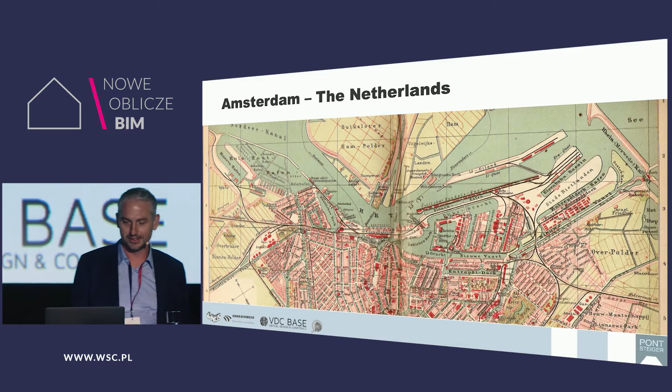The project is in Amsterdam, in the Netherlands, and you see the city center. Maybe somebody has been there already. And in the left top corner, there's an old wood harbor. We were importing wood from Finland, and we were collecting it there before it was used for the pillars or for the houses that we were building. It was a redevelopment project where a lot of houses have been made. And our story is about the big project here in the corner.

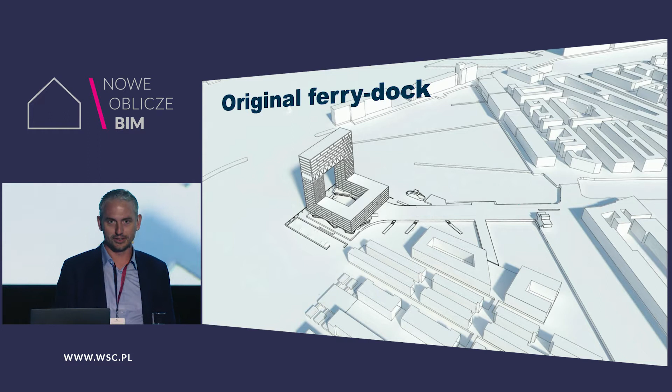It's called Pontsteiger. And why is it called Pontsteiger? There was a ferry, and a ferry in Dutch is a pont. And steiger is like a dock, so it was the dock for a ferry. And the ferry is something that we have moved to the right. And there's a building with 366 apartments.

On the top floor, it's the most expensive apartment of the Netherlands. It was sold for 16 million. It was 1,440 square meters at that time. But later the owner sold several parts as an investment, so now it's not the biggest apartment anymore. But at that time we were thinking that was the most expensive apartment. And from the apartment you have a view over the canals Amsterdam is famous for.

And to show how we have built it in the last 2 years, I have made a small time lapse. You can see it's in the water. We first have to make a wall to pump out the water. And after that, in the Netherlands, we live in a swamp, so it's not strong enough to build houses on. We drill pillars into the ground, 3,000.

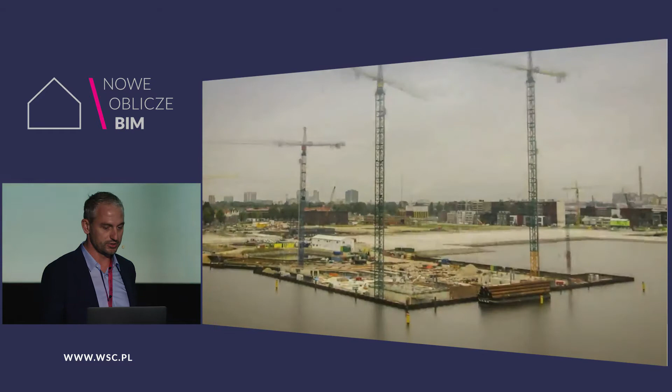And first we make the parking basement. And after that, our chief executive said we have to build this building in 2 years. So that made us think differently and prefabricate everything. And as you can see, the towers rose one building story each week.

To make the bridge, these steel frames were sent to the construction site by vessel, by boat, from the other side of the Netherlands, and picked up by two cranes and put on top of the 2 towers. So the construction of this part of the bridge took, I think, 1 week.

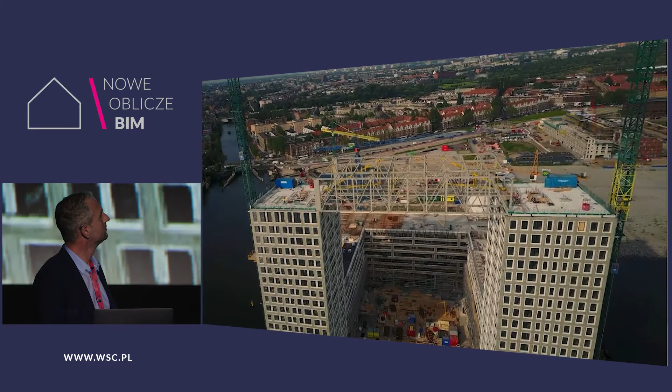And to start a project like this, I was the BIM manager of a joint venture of 2 companies, De Nijs and Dura Vermeer. Now I have my own company, VDC Base. And when I started working at that company, this was my desk. I had paper drawings. I had a laptop at that time, 2006.

And we had a kind of old-fashioned exchange format where we were exchanging the information about the building projects, called drawings on paper, with some hatches. And we had a very modern way to store all those files in the wall. And in 2007, we started with the first BIM models.

This is a museum in the Netherlands. It's an old building from 1600 something. And to make that building suitable for a museum, there had to be a lot of steel inside. You see the BIM model here. So it's a BIM model for only one discipline, the steel supplier.

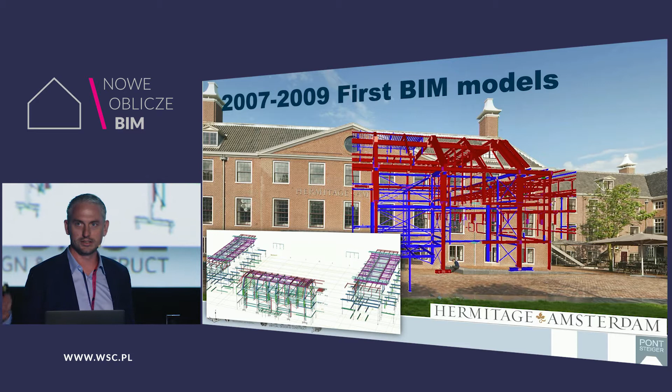And after this project, I went to another project in 2009, and that was fully coordinated in 3D. We had 8 different steel suppliers producing in several factories, all at the same time. And it was a shape which was not straight, so we needed to coordinate everything 3-dimensionally.

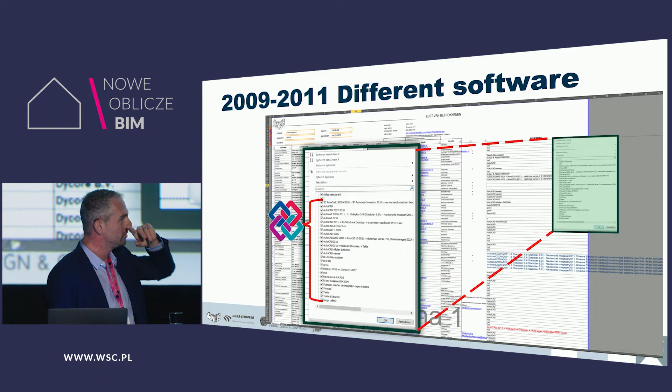And at the project, you have a lot of participants, stakeholders, and we had a list of people who were working for us. And I added one column at the end. If you filter that column in Excel, you see this: how many software packages do we communicate with for this project? So that's a list of like 10 different AutoCAD applications, and Tekla, TrueCAD, Revit already.

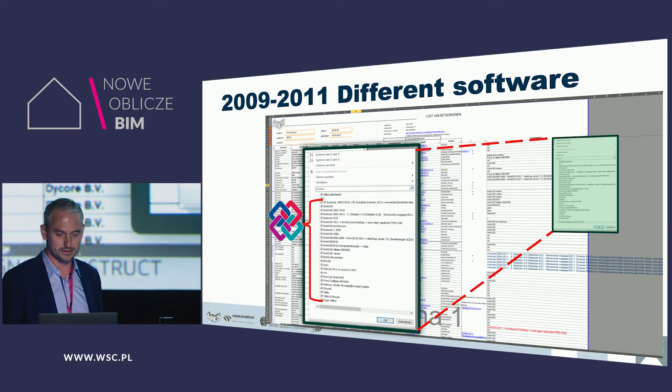And the common ground was that we were exchanging all those models in IFC. And I was coordinating that in a different program, which was coordinating IFCs. And unfortunately, we did some 2D issue management. So we also had the drawings, and I had to mark those drawings with my comments and do some redlining. And I tried a little bit in PowerPoint to do some 3-dimensional issue management. You see PowerPoint here.

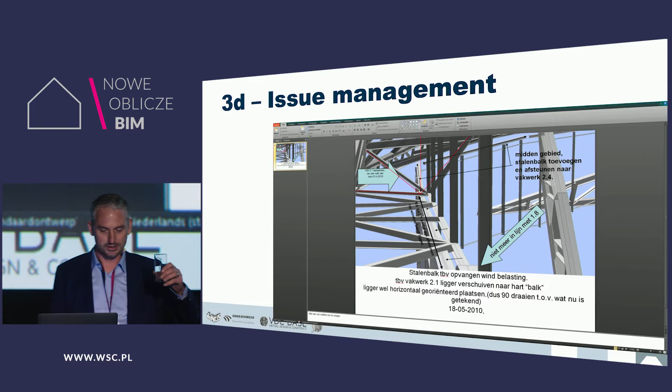Sometimes this was more valuable for my steel supplier, to give him some issues. And for the quantity takeoff, we used Excel. But almost all values are just typed into a computer, so you can make mistakes as a human. So it was a lot of work, and we got a lot of headaches from that process.

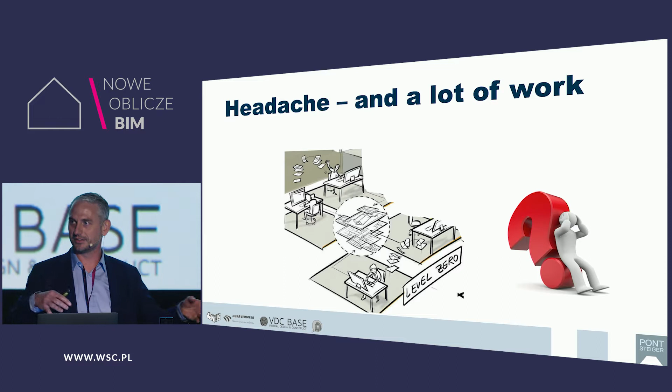Does anyone recognize the process of drawings, coloring, redlining, and then calculating it in Excel? I see some people laughing here.

So my function was to implement BIM into our organization. But why BIM? Of course, to reduce the headaches on the project. And it was a company policy at that time, because after the project I just showed, my CEO said, we're going to do this every project over and over again. And we were thinking to build it in 2 years with all the prefab. It was impossible without BIM models.

We wanted to save money on the project, and also to speed up the construction. And there was no working space. It was in the water, so we didn't have any site around it to collect materials and do things like that. It was a skyscraper, and we wanted to raise the bar for construction engineering for our companies, and because we can. And last but not least, a shortage of labor power.

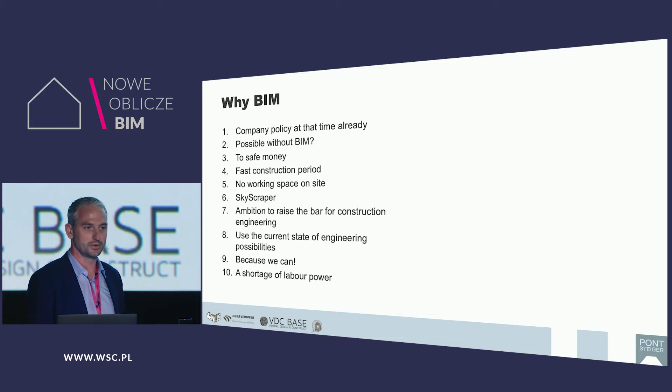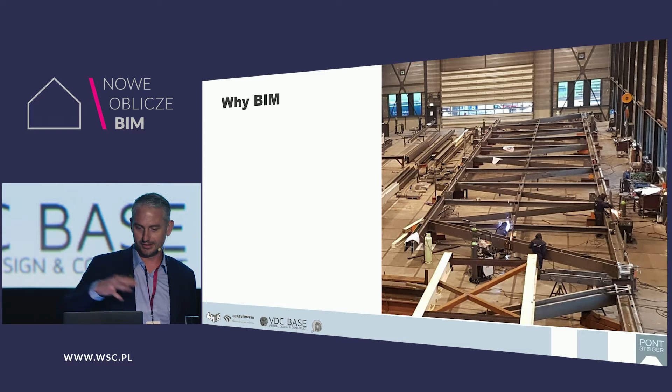So we don't have enough people to work on the construction site, so we have to do more things with machines or robots. So we prefabricate, and to prefabricate you have to build it first in the computer, virtually. So we did BIM from the designers. The architect was also modeling until the end, but also to interact with manufacturers and back. So the frame you just saw with the 2 tower cranes was first assembled in the factory, then moved to the construction site. So that was one of the prefabricated elements.

So we needed to make some agreements, and because it was a joint venture of 2 companies, the guy from the other company and me had to make one plan. And that's a good thing about a joint venture of two companies: you can do better than one company on its own. So we decided, let's put all our BIM protocols, execution plans, exchange information requirements together. What's the core? What's the best that we should agree on? We didn't want to think of something new, but to combine several things that are already working.

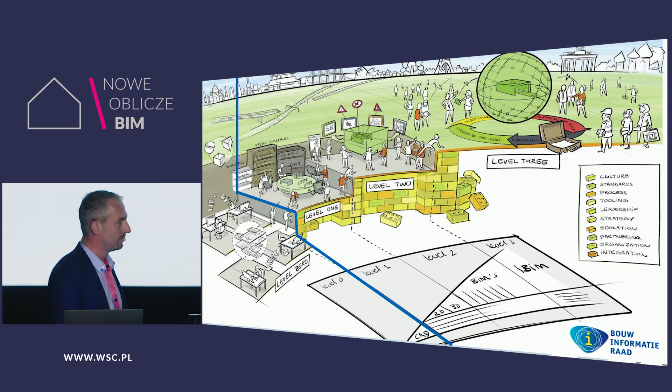And for the BIM levels, we have a national organization called the Construction Information Council, which divided BIM maturity into several levels. If you see my history working on BIM level 0 with paper drawings, I used that picture in one of my slides with the headaches. That was BIM level 0. Then you can do BIM level 1. BIM level 1 is that all the suppliers are making their models, but they are not federated yet. You see them just next to each other.

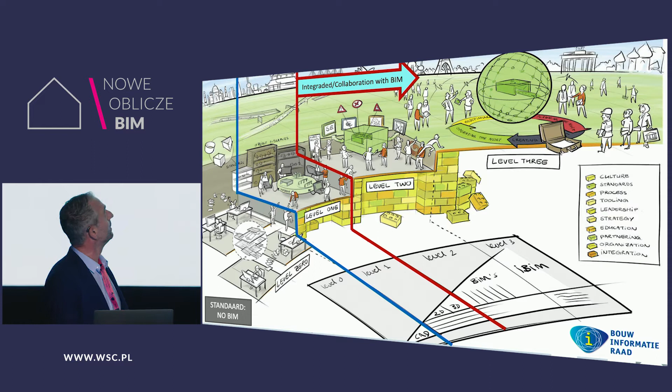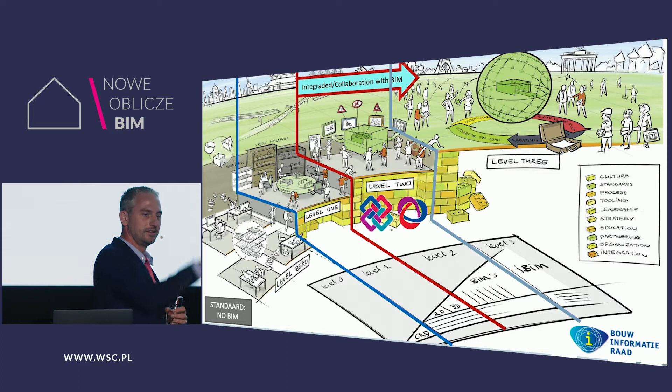So we decided we do BIM level 2. And from BIM level 2, you are integrated. You integrate the BIM models together and do the analysis with that. So you need two main files, IFC and BCF. I saw a lot of presentations using BCF and IFC too, so I'm really happy to see that. And you have BIM level 3, and some people are thinking about what's happening there, but we decided to do this whole project on BIM level 2.

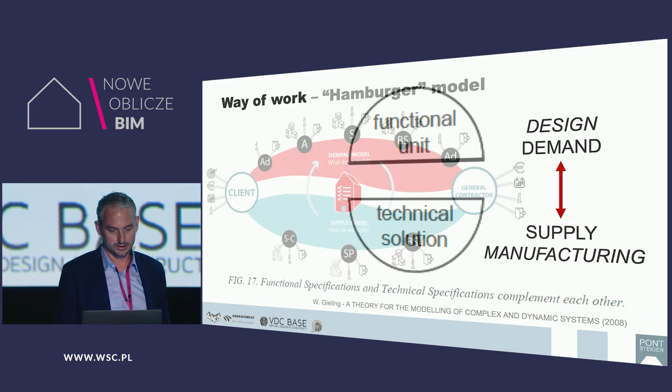We made a Dutch flag, red, white and blue. I think all general contractors in the Netherlands work with this infographic. You have the architect on the top, he makes his model, and you have paper drawings, some different information. Also the structural engineer, but also the suppliers. And everybody is involved. So that's the hamburger model.

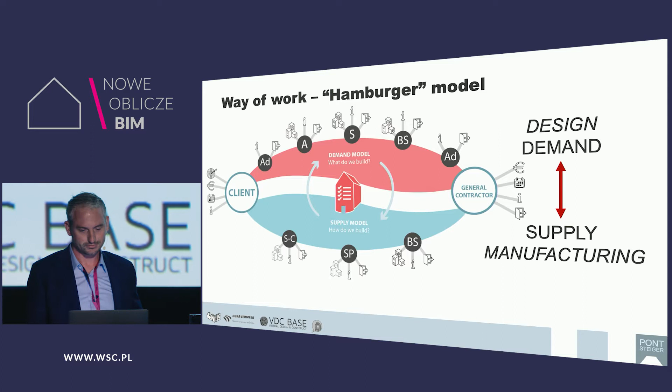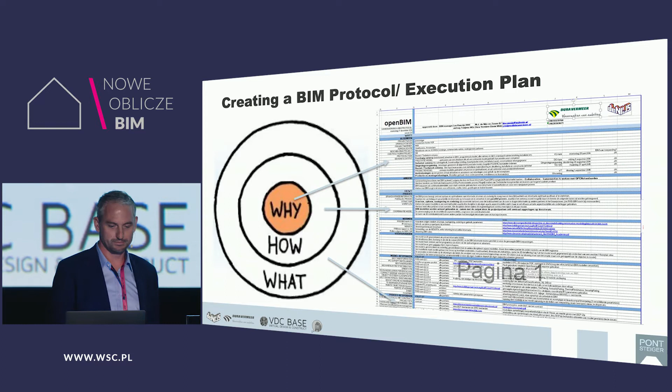And to create a new execution plan, we had several already. I had some coaching lessons from a coach, and they said you have to look at the golden circle of Simon Sinek and tell your story always in the same order: why, how, what. So we decided to make a BIM execution plan on one page, on one Excel sheet, and we said, why are we doing this? How are we going to do this? What are we doing? Why, how, what? And to understand the project, we made an infographic which explains IFC.

So IFC: you have a file with a site and a building story, and on the building story you have spaces. Spaces are in the requirements of the client, and around the spaces you have different objects to form the spaces, and they have different kinds of information. So we tried to explain to all the participants with this poster how it works.

And if you do a big project like this, the first decision you have to make before everybody starts is how do we frame this project. So we decided day one how to split this model, because there's still not any software that can handle all the models in one view. I've never seen this project in one viewer because it's too large. And we coordinate like the green part in the beginning. A month later, you do the red part, so you can manage that better.

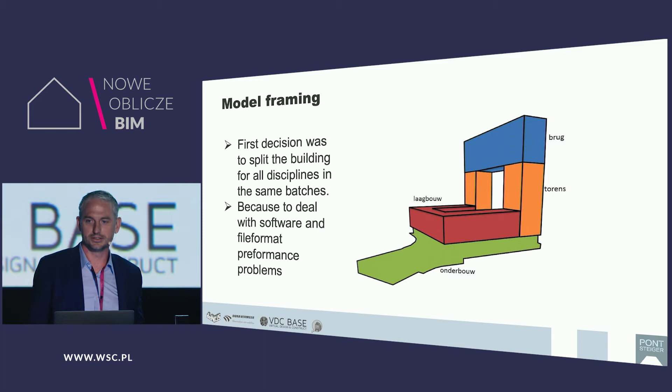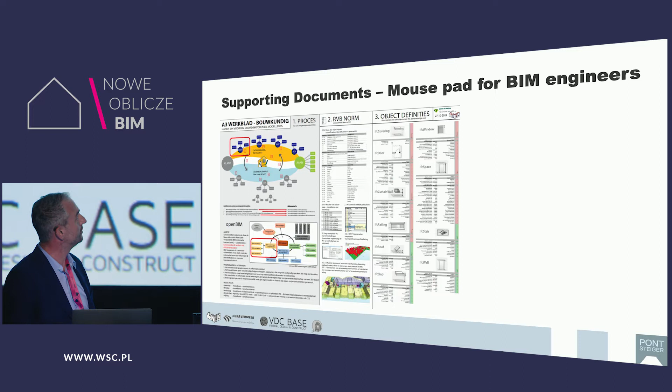And we made some supporting documents. This one's for the architect, and the architect has to make some spaces, the fire rating objects, and we said for each object which properties should be in the model.

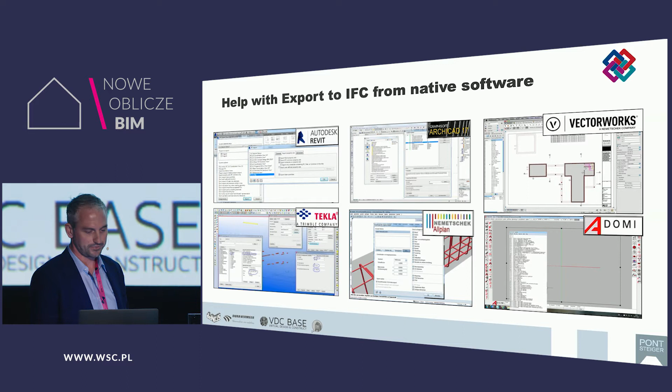And a lot of software developers said to us, if you work with IFC, you lose a lot of information. And we proved that is not true. You only have to know what you're doing. So we investigated all software we are working with, and we came to the settings that you have to use to export a model without losing information.

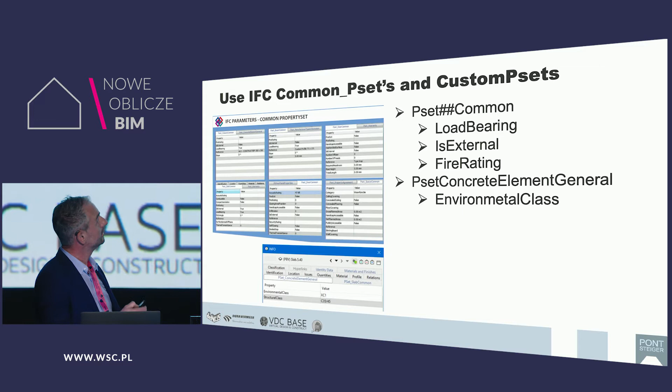And another quite important decision was to follow the English properties which were described by buildingSMART International. We are Dutch, we don't speak English, but we say if we translate everything and all the software has to be translated, we are busy for a few years translating it, and then we are already somewhere else in the development of the BIM levels. So we just follow the international standards. For example, for the strength of the concrete, we can use the structural class. I don't know if you use these numbers too in Poland, but you might recognize it.

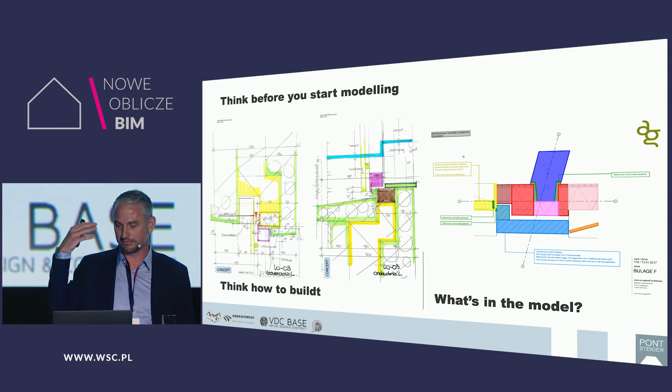So the next step is concurrent engineering. We gave the suppliers the contract before all the design was finished. So we came together with the architect and the suppliers on how to detail the facade to prefabricate it. The architect cannot think it up by himself. He has to get input from the supplier. So you have to decide what's in the model. So we have to collaborate with all the laptops on the table. How do we detail all these objects?

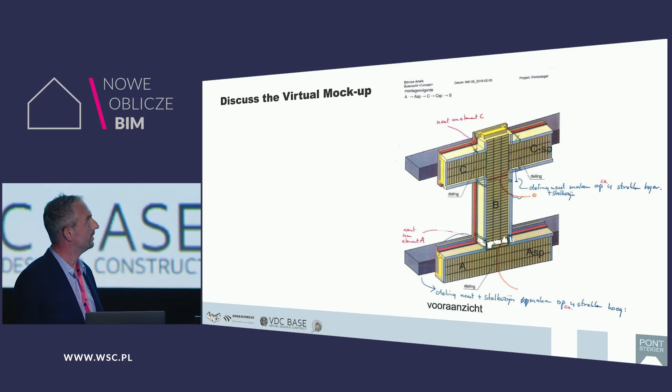And you just start at one small part of the building, just a virtual mock-up. We also had a real mock-up, but we made a virtual mock-up before we started modeling the whole building. And at the end, we had a structural design, we had MEP design, and from the architect we had 3 types of models: the facade, the interior walls, and all the space objects. And those were linked to each other. So if you have seen a drawing from the architect, you see the water pipes of the MEP design and the structural walls of the structural engineer.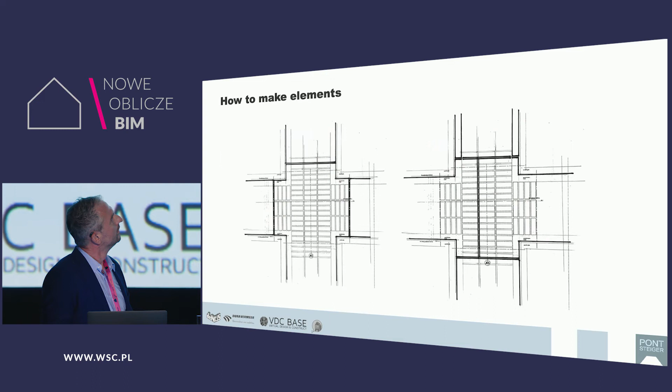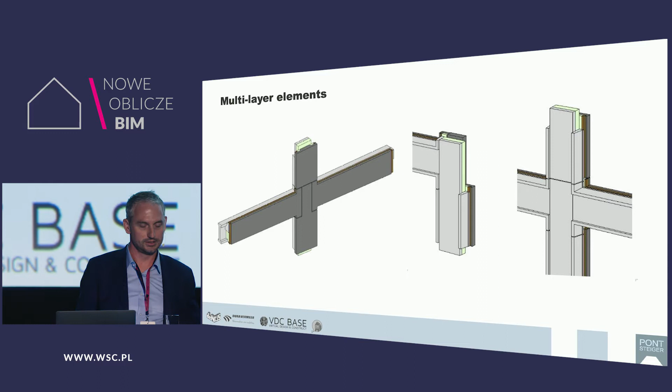And yeah, this is really important for the architect, how to detail all those prefab objects from 2 sides. They were multi-layered, so it was not only concrete, but also insulation and the outside. So teams were working together to handle this. Every week they come together, solving issues to speed up the project. And the coordination is not only clash control. We have split it into 4 stages.

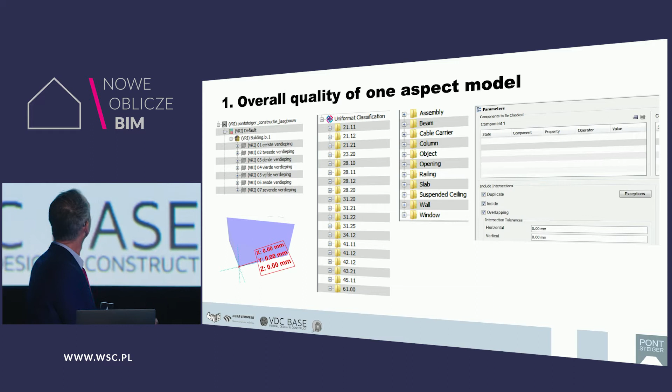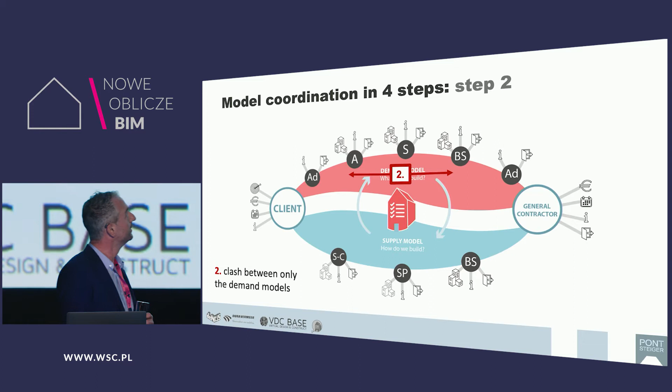So step 2 is to coordinate the design. The design should be coordinated before we send it to the suppliers, because otherwise they have to solve issues that should be solved by the designers. So we link those objects, and we have written rule sets to check that. For this we used Solibri Model Checker, and these kinds of issues were solved with that.

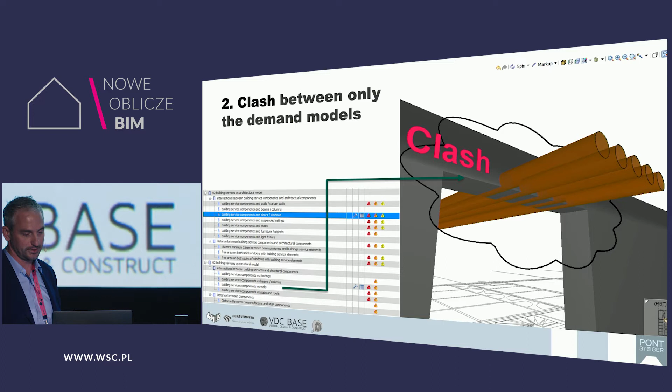Sounds easy, but sometimes it takes a lot of time too. But with a model, it's faster. And step 3, maybe it's new, but what we do is we say, this is the prefab concrete of the structural engineer. We're looking for a supplier, and the supplier has to make a model.

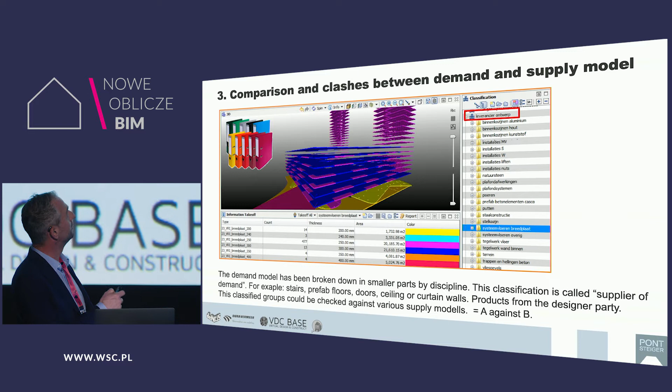So we first tell him these objects, in this case it's kind of prefabricated slabs. These objects, you have this square meter, you have to produce that. And for example, the facade, this was the design, this is the supplier, and if you look at them together, you see little differences, but they shouldn't be too much. You see here a little bit, but the outline should be the same.

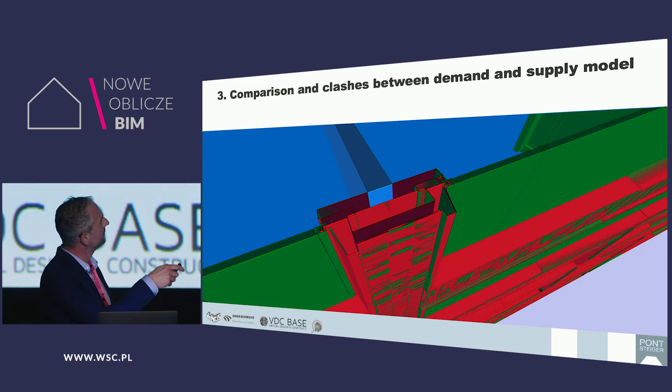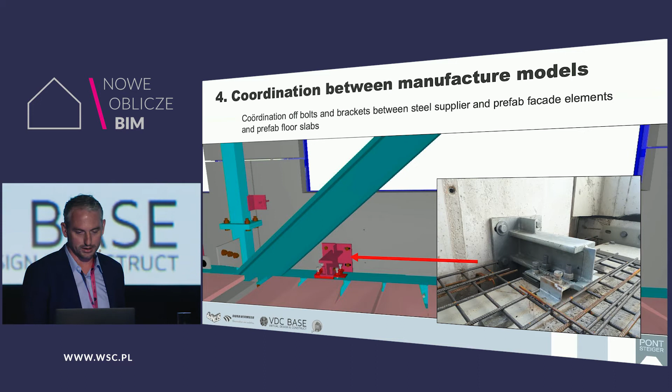On the right, you see the result on site. You see this is all prefabricated, it's all aligned. So this was a dream for me that came true, that everything was fitting that great.

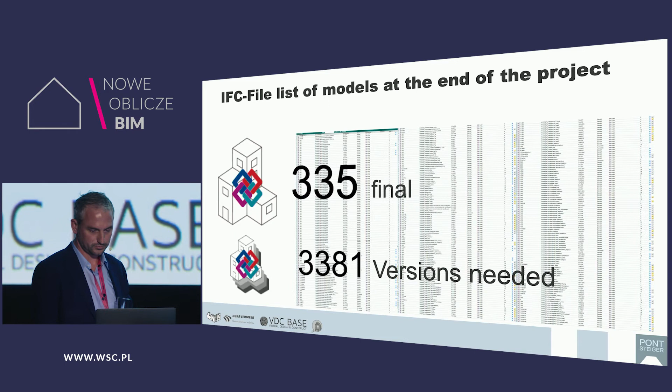And at the end of the project, we had 335 final IFC files, and it took us 3,381 to get there. So on average, 10 revisions for each discipline. I think the architect had 50, and some suppliers maybe 2, but on average. So that's why we think that's BIM at its best, and then we signed up for the BIM award.

Of course, there were issues to be managed, and issues should be managed with people. So don't forget the people. They have to get together, get behind the computer monitor and solve all those issues. We had 2 BIM managers. In the beginning, I did it with my colleague of the other company. We did the first 2 stages. And after the building permit, we trained 2 BIM directors on the project. There was Mark and Mike, and they were like the leaders of the project,

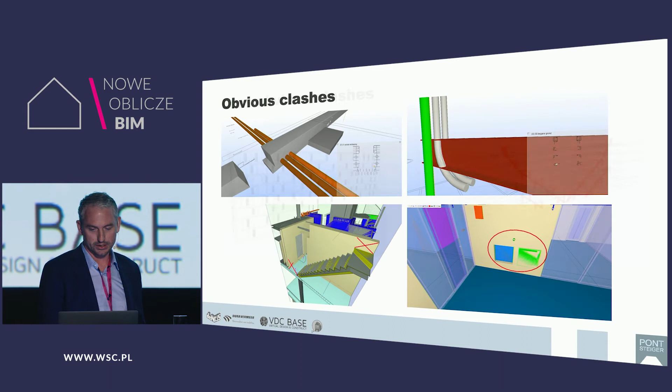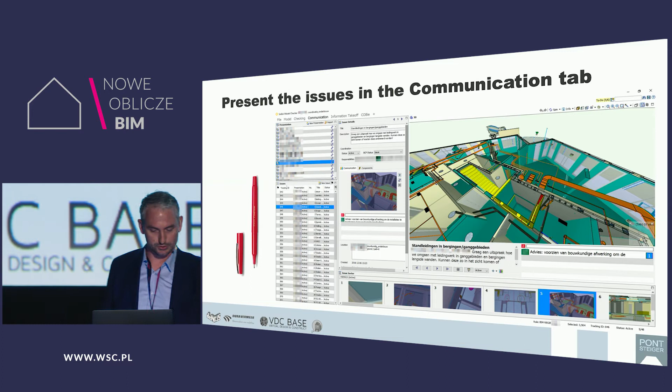virtual. And yeah, we solved the obvious clashes, but also less obvious clashes. Here you can see doors which cannot be opened because there's a steel frame behind. That's how the architect also checked his model. And it's not wrong to have issues, but you have to communicate around issues. And we used BIMcollab and the issue management in Solibri for that, to exchange it with BCF. So we didn't need this tool anymore, but we did it in the computer.

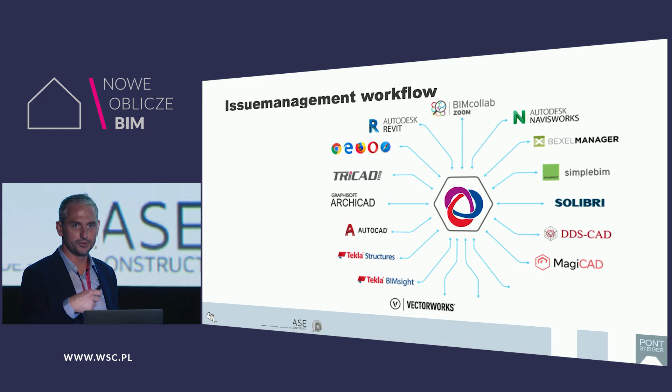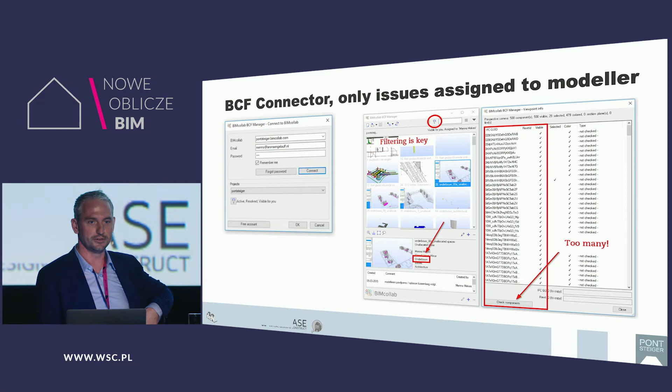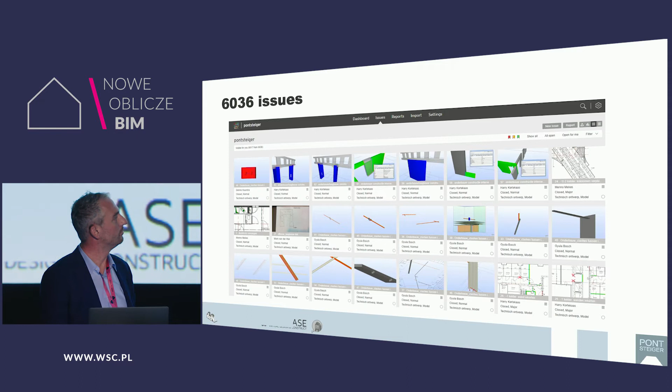And because there were, I think, 32 different suppliers working in different software, we used BCF to communicate all these issues. And this is an infographic of BIMcollab, which has some integrated BCF supporting tools. So the architect can log in with his own name, and he sees only his own issues. Saves a lot of time searching all the issues. And at the end, we had 6,036 issues, and not every issue is in the system, only the main issues. But it took 2 years for that.

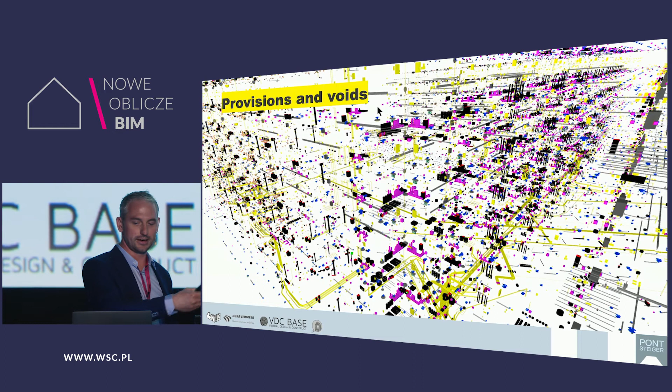And if you see all the MEP suppliers making models, we have floor heating, mechanical ventilation, and electrical equipment. They're all in the model. And it's nice to have a lot of installations in your house, but to build it, you need a lot of provisions and voids. So if you prefabricate a wall, you have to know before you produce that wall where there have to be provisions and voids. So we also had models of all provisions and voids, so that we can send that to the supplier, and then he knows you have to make a hole right there, and right there.

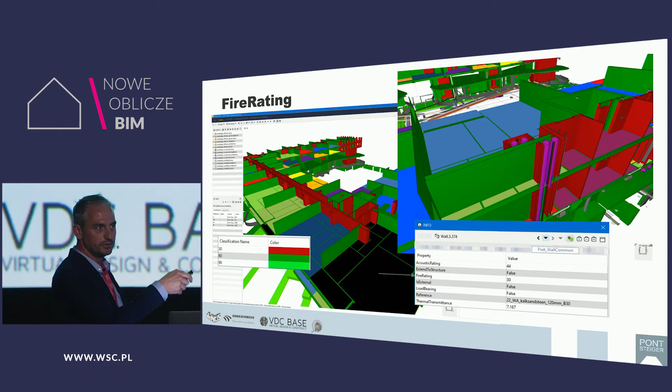And all those barriers between different apartments should have a fire rated wall. You see here the black squares and here the blue squares. That's a different zone. So you have rooms or spaces, and these are rooms or spaces, but it's a different zone. In between, there should be a fire rated wall. And not only fire rating, also acoustic rating or thermal ratings, they should be in the model. And if you have good models, you can do the quantity takeoff.

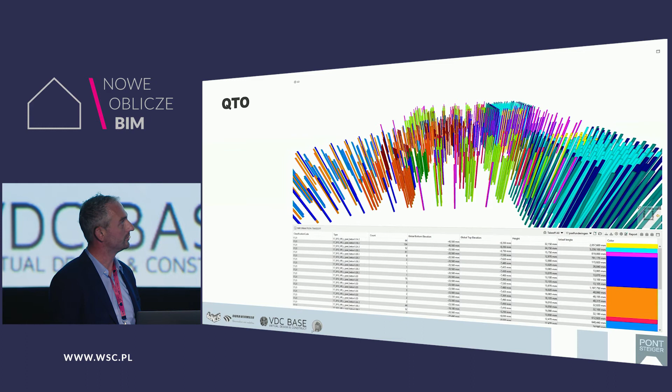This is a typical Dutch thing. It's like piles below the surface, to sandy layers at 20 meters, and some are 40. So we have different sand layers below the swamp. You have to drill really deep to get enough bearing capacity to get big buildings on top of it. And for the client, it's really important that all rooms or spaces are there in the model with floor covering, wall covering, and ceiling covering. They're not all there in this model.

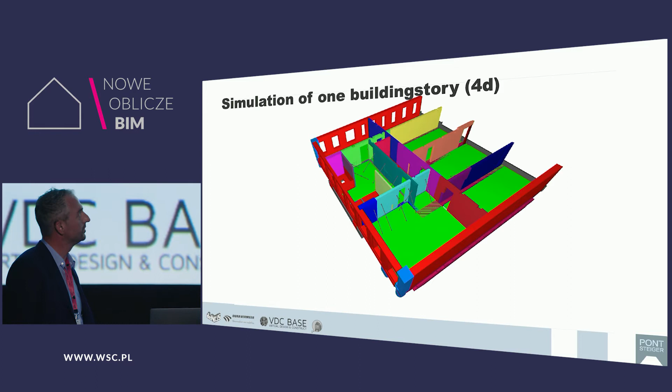And if you plan prefabricated, you have to do every 10 minutes in your planning. So we use the model for analyzing one building story. And then you can see that we also use the temporary stuff in the model. This is also temporary, the yellow things. You see the safety here. This is the blue things.

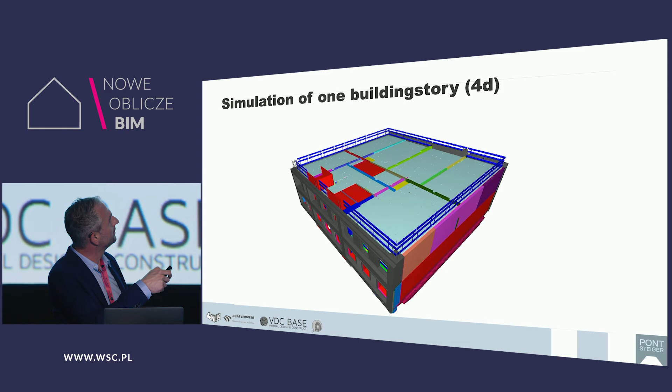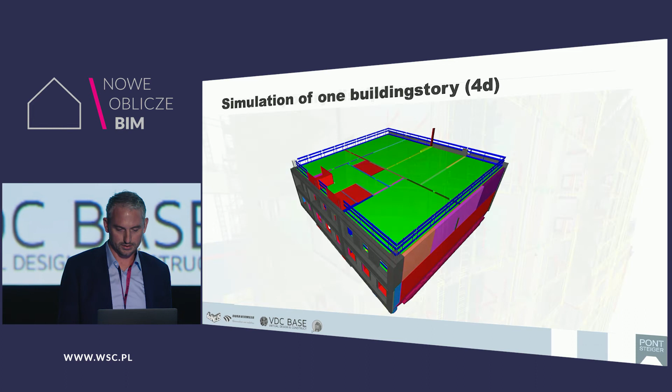Now there comes the facade. And then the next level. So we didn't fully coordinate the whole project in 4D, but we researched one story to decide if it's going to work. And you also see the purple stuff. That's like a container with materials which are used inside the apartment. So it's quite difficult. And also the temporary stuff is in the model, like the scaffolding, the tower cranes, etc.

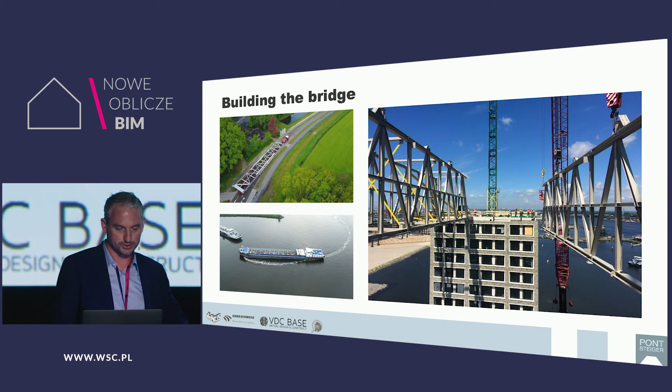And from the prefabrication and assembly, this is all prefabricated. You can see here some pictures: steel framing, concrete outside, inside, and you see here the vessel with all the steel frames coming from the other side of the Netherlands, transported from the factory to the water, and then from the water to the project, and the project was on the water, so it was good to do that. And we had some frames which were also positioned in the model because there has to be some support in the soil to put these frames straight up there.

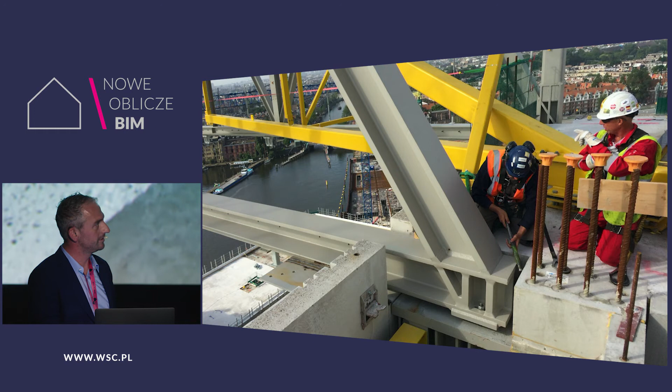Now you can see the process was modeled first, and then with only one bolt on this side, and on the other side also one bolt. It should fit perfectly. And another object, we had the model of the structural engineer. We had the windows of the architect. Now this is the windows from the supplier, wooden frames. This is the architect's model. Some temporary stuff at the outside.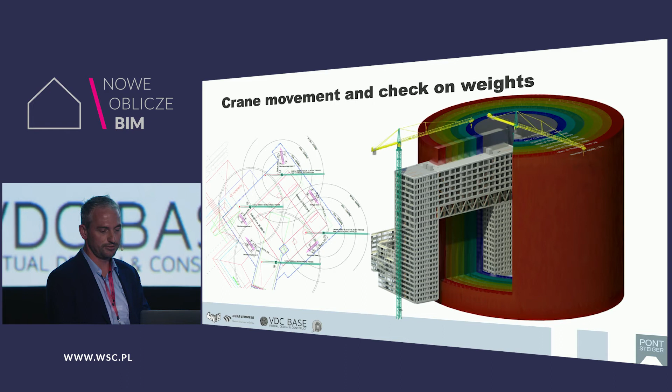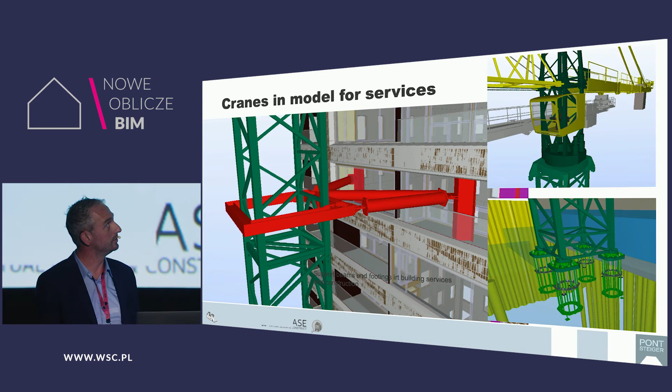We had to do some analysis about how to drive around the construction site because there was water on the side, so we needed this extra corner, and this has to be visualized. Also the crane has some strength on certain positions. We couldn't handle a too heavy element with the crane. We had some powerful cranes, but if an element is too heavy, we have to split it into two pieces. And also how to anchor those tower cranes to the building during the construction phase should be there. This is where they talk about the trusses, anchors.

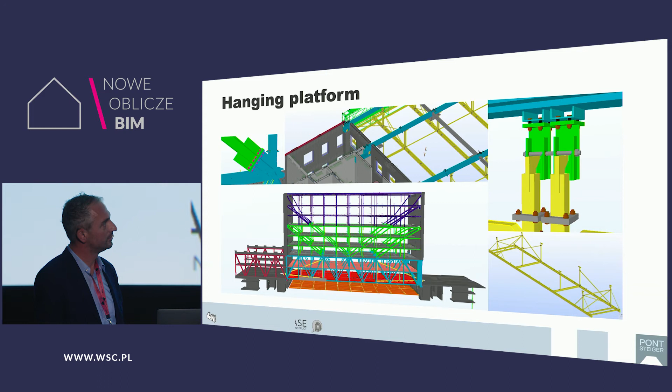And under the bridge, there was a temporary scaffolding, a hanging platform. And of course, that was also first modeled because we needed some provisions in the steel frames to hang those things. And this is the result. This is 60 meters high, a temporary frame. So then we thought this is BIM at its best, so we signed up for the Building Smart Award in 2018, and we won it. And after that, I was invited to several places to tell this story.

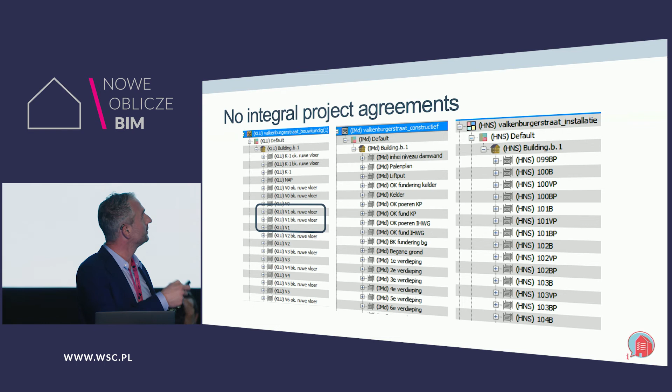This is the same project, on top of it. But the structural engineer said, these are my levels. This was the architect, he said, these are my levels, and this is the MEP. So that's not good for automation of processes. So we decided, this is me, and this is the guy from the joint venture project, from another really big general contractor of the Netherlands, to invite all other big contractors into one room.

And then we started to play a game. We agree or we disagree. We were thinking, let's try to get to know what we all agree on, or what we disagree on. And that was my first thing after I stopped the former project. We started to do this because it was important. We have written down, in just one afternoon, what we all agreed. So these were arrangements outside of our CEOs, but all the BIM managers were coming together. What do we all agree?

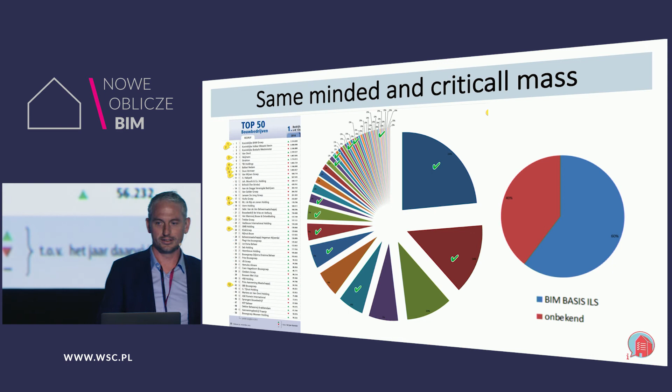And we signed it. So we said, if all BIM projects in the Netherlands will be like this, we are really happy. And with this top 50 of general contractors in the Netherlands, we had all these companies, and together we had like 60% of the total turnover of the construction world. So we had a majority, and we produced an unbranded infographic. So you don't see any name or logo below it.

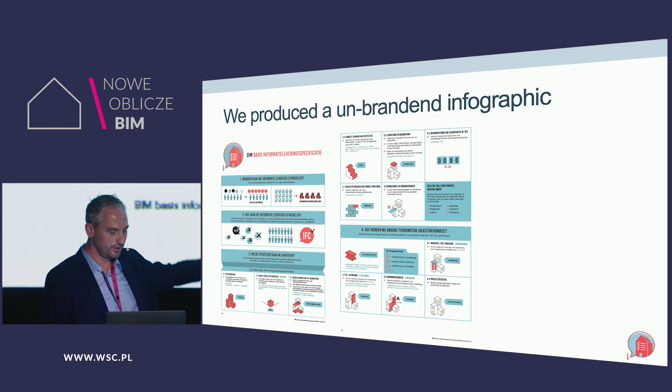And why did we do that? So that all people who also agree with this document can make it their own without having our logo there. Actually, we have translated it also to Polish, with the help, I think, of the company who's organizing it.

I'm not really sure. So these are the main agreements you should make on all projects. On different projects we can add things, but this is the core of a good project. And the main agreement is to share those files in IFC. So you can probably read this. I'm not, but I recognize IFC, so I say, yes, let's go.

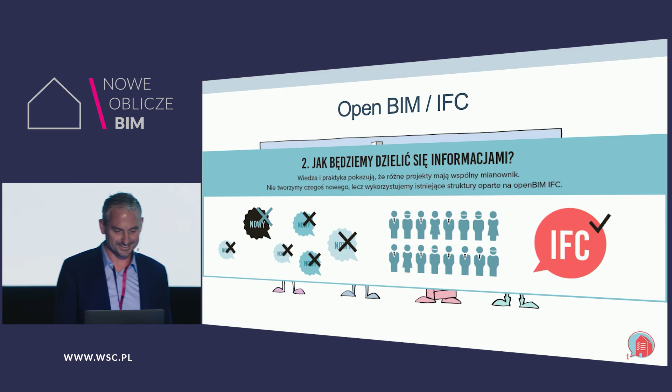So our workflow in the Netherlands has no vendor lock-in. So you can make a model in every software you want, as long as we can coordinate it with IFC files. And if we have all those IFC files, there are a lot of people who can join with free software. I spoke to the people of BIM Vision. It's a Polish development. BIMcollab is Dutch, and Solibri, of course.

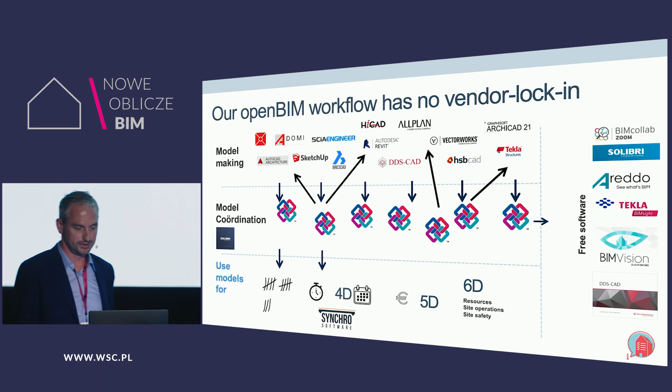And with all those models, you can do extra use cases, for example quantity takeoff or some 4D scheduling. But as long as you demand IFC, then you can do a lot of other things, and you don't need one vendor. For example, the three main agreements for a good BIM model are to make agreements about how to write the file name, without the date, without the name, just a project and a discipline.

Or the local position should be coordinated between all the models. It still goes wrong on some projects. Or what's the name of the building storey? If everybody agrees with this list, everybody has to use the same building storeys, otherwise you have some problems. And the correct use of entities.

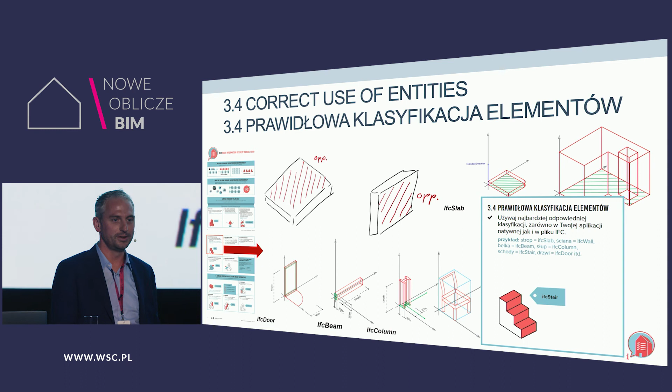Why correct use of entities? So that you can filter the model on certain entities, but also if you use quantity takeoff, the area of a floor slab is the top, but the area of a wall is the side. You can model really high floors that look like a wall, but if you don't tell it it's a wall and it thinks it's a slab, then you have wrong quantities.

And also every country has its own system classification. So maybe you have a system to classify objects for doing some budgeting, or we have a Dutch number. And also every object should have a material so that you can color it automatically. And we don't want duplicates and intersections in our model, which are not allowed.

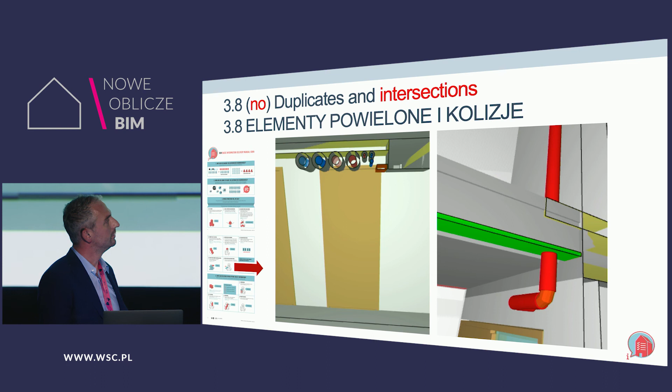And for example, if you make a wall in Revit and a wall in Archicad, there's always the property IsExternal, true or false. You don't recognize it, but it's always there. And actually, we only say just check if the property is right. You can make interior walls and exterior walls. You have to handle them differently, for example to do some thermal analysis or other things, also for the planning.

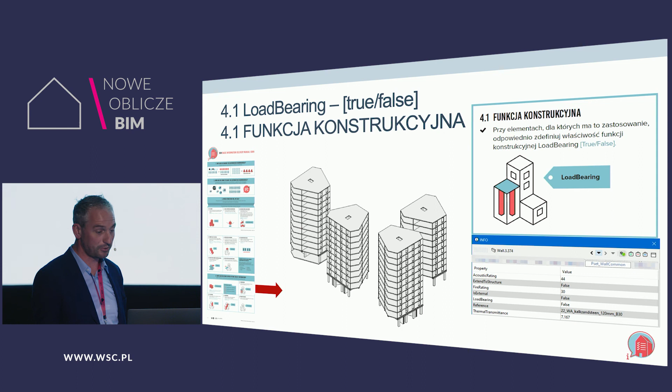And also the same objects all have load-bearing true or load-bearing false. It's very basic, but just check if they are correct in the model. Fire rating, just fill in the number, 30, 60 or 90, and we can show with colors where the fire-rated walls are, and so on. We have different objects. So if you're interested in that, we have an English part on our website.

The BIM Loket is a Dutch government-paid organization, and you can download the Polish version of those agreements. And not only the Polish version, but also different languages around the world. We have French, Portuguese, Estonian, Swedish, Russian. Romanian is there already, but it's not colored yet.

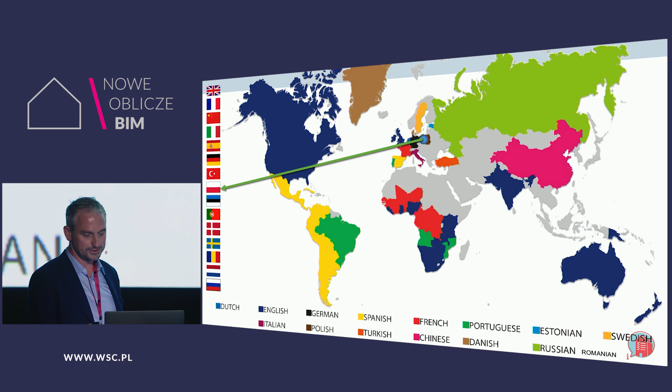And last but not least, what I was busy with when I was working at the company: to make all the manuals on how to export those models in a correct way. I had my manuals, the other company had their manuals, and we combined the powers for free to make national manuals that everybody can download, so that we can do other things than making manuals. Most are in Dutch, but I think if you look at the screenshots, you can follow it. You can also download it on the website.

We have a management committee. I'm the chairman of the expert committee about it. We are, I think, about 80 people busy with this. Not every week, but every quarter of the year. And we are not completely satisfied yet, so maybe we can have a revision to version 2.

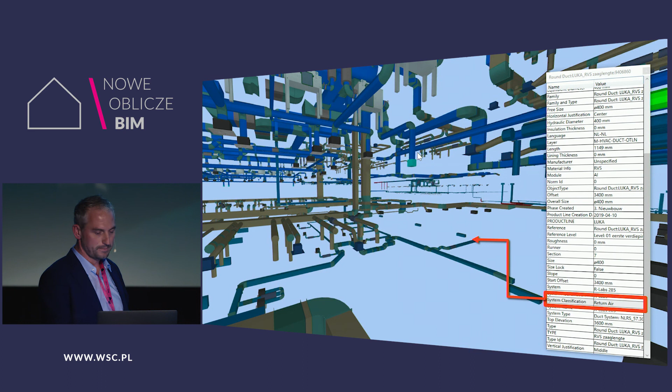For example, I'm working on a large project with a lot of MEP, and I want to filter those kinds of models with one click to see how the return air flows through this building. So we will probably add one tile: give the system classification to the MEP objects.